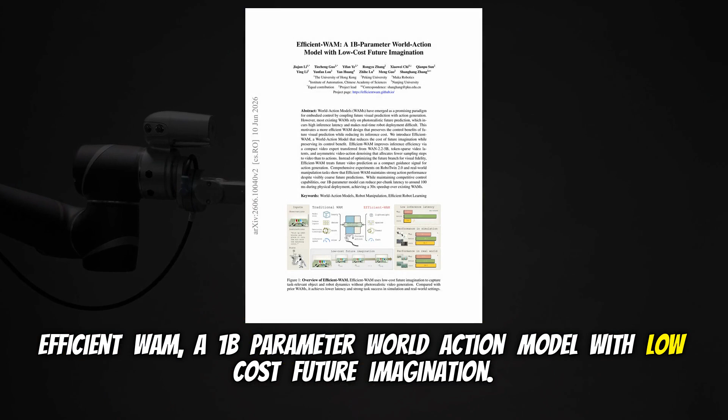Efficient-WAM, a 1 billion-parameter world action model with low-cost future imagination. Yep, that's the paper we're looking at today.

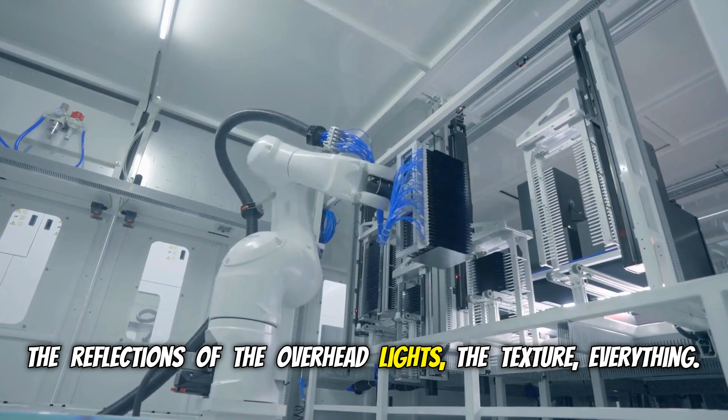Imagine trying to pick up a coffee cup from your desk. But before your brain lets your hand move, it forces you to paint a photorealistic masterpiece of that cup in your mind, complete with the reflections on the ceramic, the overhead lights, the texture, everything. You would move incredibly slowly. And for years, that is exactly what we've been forcing robots to do. World action models, or WAMs, are incredible for giving robots physical intuition, but they're completely bottlenecked because they waste massive amounts of compute trying to generate high-fidelity, photorealistic future videos before they act.

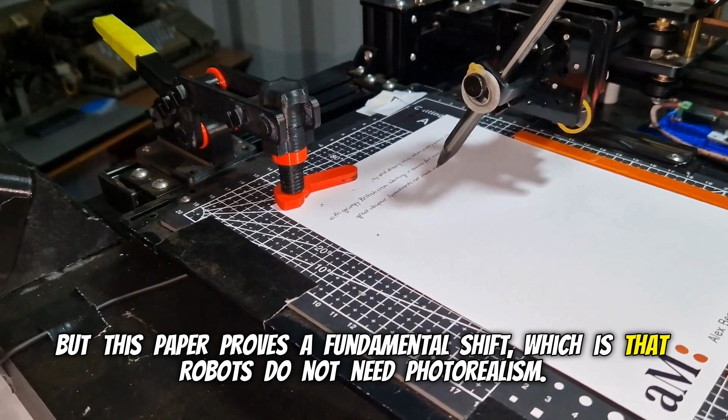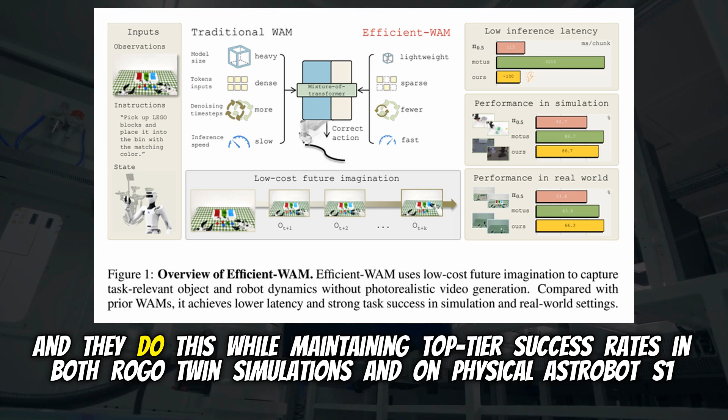But this paper proves a fundamental shift: robots do not need photorealism. They only need coarse geometry and motion cues. So the researchers pruned a 5 billion parameter foundation model down to a 1 billion parameter mixture of transformers. They used intentionally low-resolution future latents and applied an asymmetric denoising schedule. The result is wild: a massive 30x speedup. They cut inference latency down to just 98 milliseconds per action chunk on a standard consumer-grade RTX 4090 GPU, which is huge for edge deployment. And they do this while maintaining top-tier success rates in both RoboTwin simulations and on physical Astrobot S1 hardware.

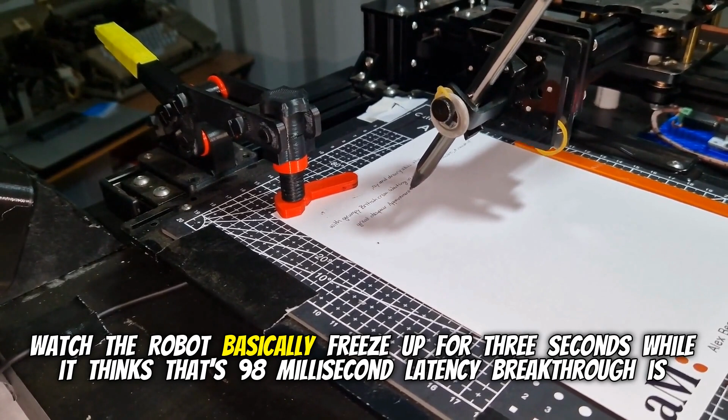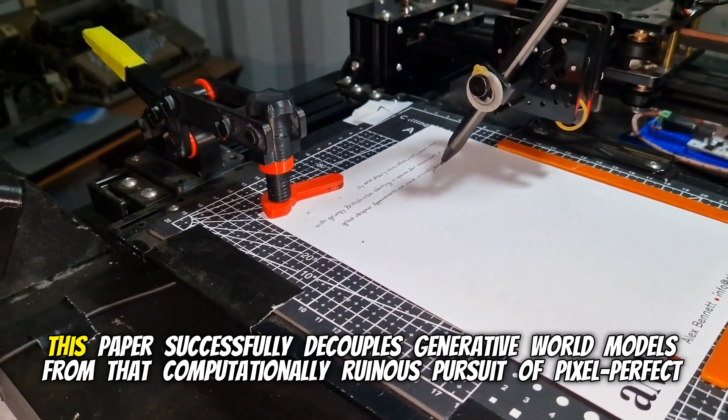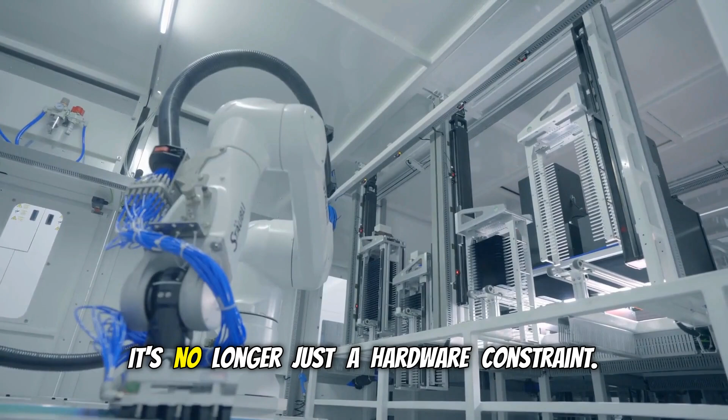Yeah, 3 seconds is an eternity in robotics. It really is. This paper successfully decouples generative world models from that computationally ruinous pursuit of pixel-perfect rendering. For a long time, the prevailing belief in the field has been that sharper, more realistic future visual predictions would naturally yield better physical actions. Like better vision equals better action. Exactly, but this research reframes efficiency. It's no longer just a hardware constraint, it's a fundamental modeling problem. They're basically asking, what does the policy actually need to see to make a physical decision?

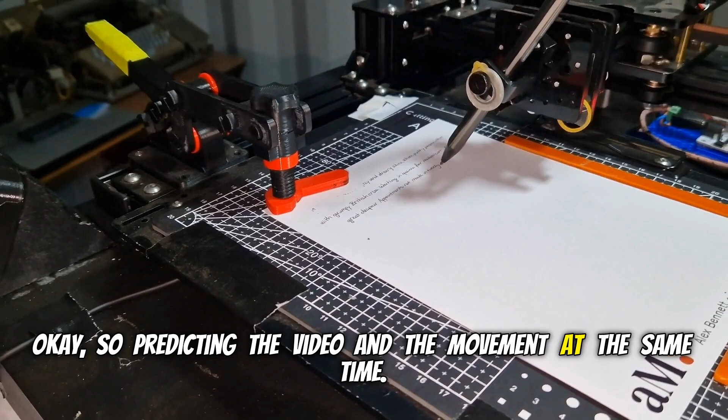Okay, well let's unpack the baseline bottleneck first, so we understand what we're actually improving on here. We hear a lot about these state-of-the-art world action models right now. But what is the actual mathematical objective they're trying to solve that makes them so incredibly slow? Well, the standard WAM objective is to model the joint distribution of future scene evolution and control actions. So predicting the video and the movement at the same time. Right, in plain terms, the model takes in the current visual observation and a language command, and it tries to simultaneously predict two things: what the next few seconds of video will look like and what motor commands the robot should execute to make that future happen.

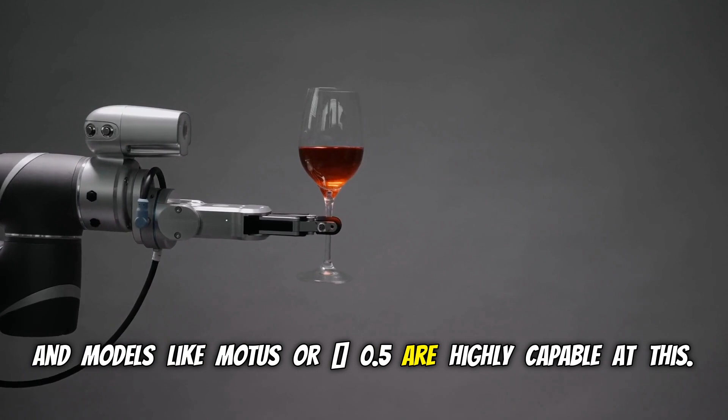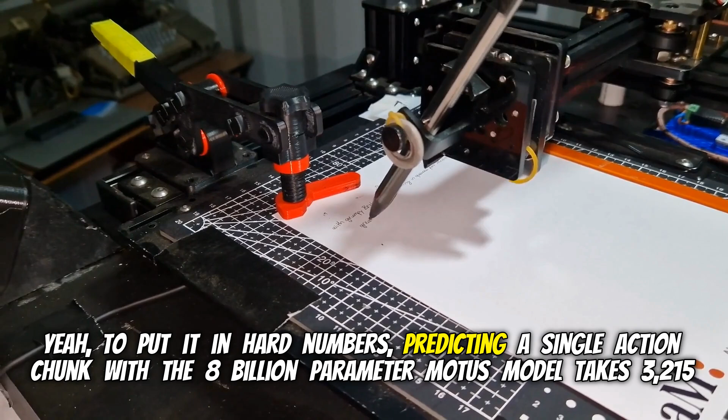And models like Motus or Pi 0.5 are highly capable at this. They're built on massive transformer backbones and process very dense visual tokens. But because they're generating high-resolution video frames alongside the actions, the computational overhead is just staggering. Do we have a sense of exactly how slow that makes them in a real-world deployment? Because slow is subjective. Yeah, to put it in hard numbers, predicting a single action chunk with the 8 billion parameter Motus model takes 3,215 milliseconds.

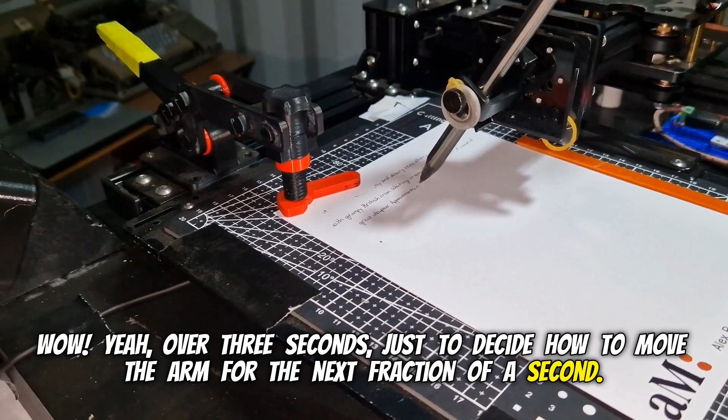Over 3 seconds, just to decide how to move the arm for the next fraction of a second. Over 3 seconds, which again in robotics is an absolute eternity. It's useless in a dynamic setting. If you're working in a kitchen where a pot is boiling over, or a warehouse where a human is walking by, the entire state of the world has changed by the time the robot finishes calculating its 3-second imagination of the future. Which brings us back to your coffee cup analogy. The authors introduce a principle they call action-centric future imagination. I like that phrasing. It basically means the control policy only actually needs structural cues.

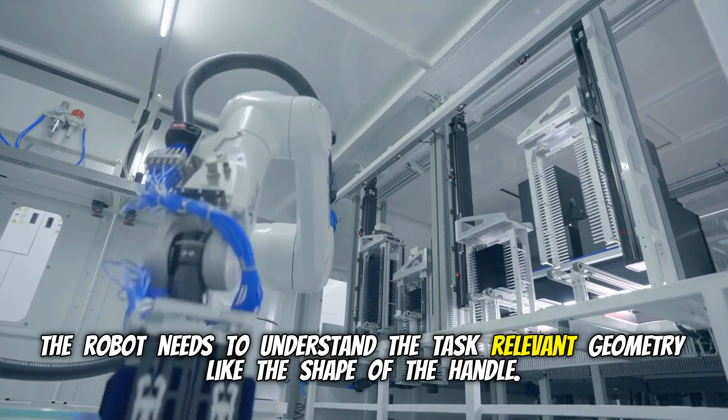Think about the physics of grasping. The robot needs to understand the task-relevant geometry, like the shape of the handle. It needs to understand motion tendencies, like the fact that the liquid inside will slosh if you move it too fast. And it needs to understand contact boundaries.

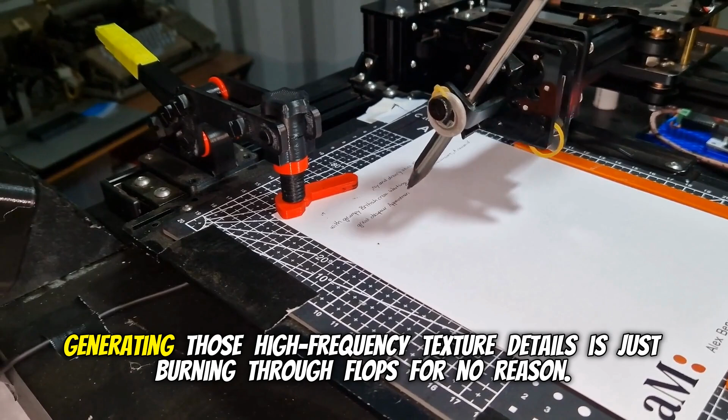Whether the ceramic reflects the room's lighting perfectly, or whether the background wallpaper is rendered sharply, is totally irrelevant to the motor control. Generating those high-frequency texture details is just burning through FLOPs for no reason. Exactly, it's a complete waste of compute. Okay, that makes perfect intuitive sense.

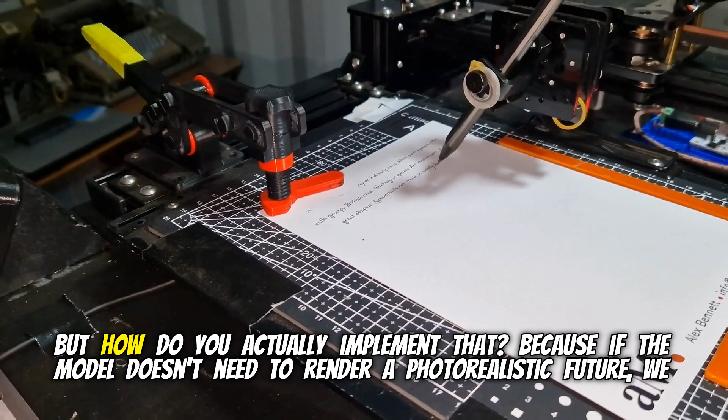But how do you actually implement that? Because if the model doesn't need to render a photorealistic future, we obviously want to shrink the architecture. Right, but you don't want to throw the baby out with the bathwater. These massive foundation models have spent thousands of GPU hours learning how physics works. Gravity, object permanence, friction. So how did the researchers intelligently shrink the model without losing that deep world knowledge?

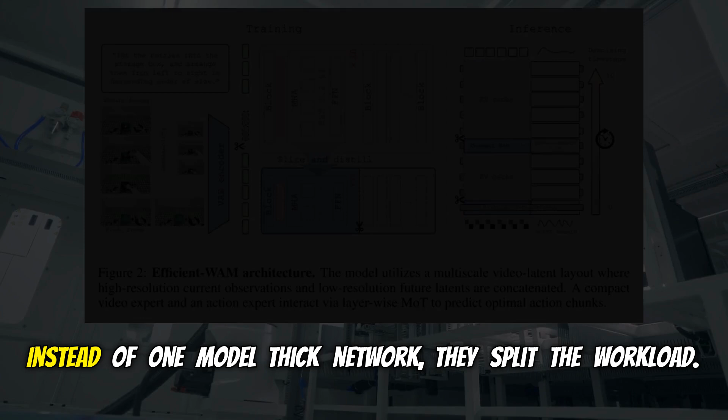So they built a compact mixture of transformers, or MoT framework. Instead of one monolithic network, they split the workload. They created a 0.8 billion parameter lightweight video expert and a 0.2 billion parameter action expert. The video expert's job is purely to predict the visual evolution of the scene, and the action expert's job is to extract motor commands from that prediction.

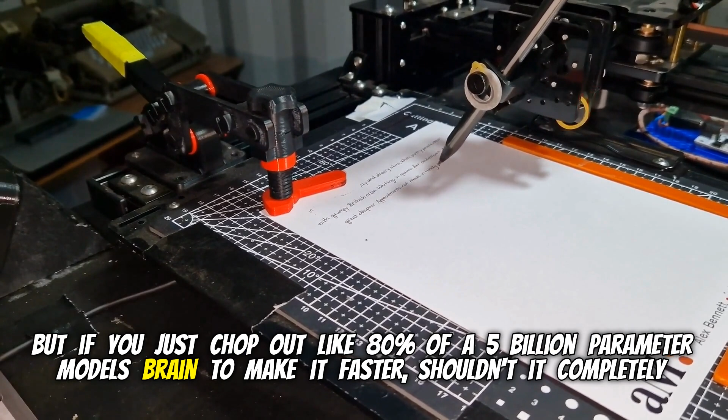Wait, I'm stuck on something here. Getting down to a 0.8 billion parameter video expert sounds great for speed. But if you just chop out like 80% of a 5 billion parameter model's brain to make it faster, shouldn't it completely forget how physics works?

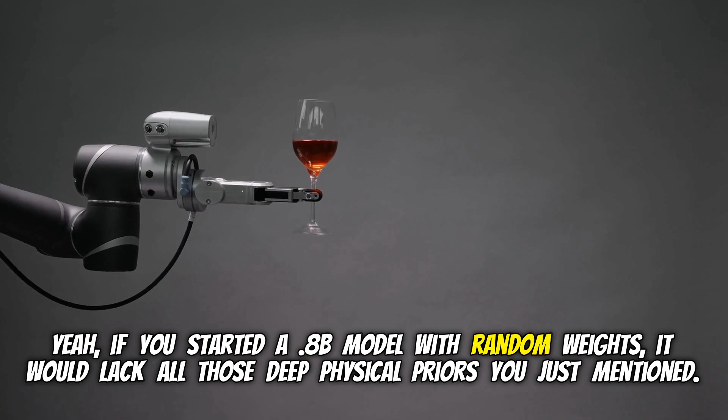Well, you don't train the smaller model from scratch. Yeah, if you started a 0.8B model with random weights, it would lack all those deep physical priors you just mentioned. Instead, they used a technique called structured pruning on a specific foundation model. Which one? Wan 2.2 5B. Okay, so that's a massive, highly capable video generation model.

Right, the researchers performed what's called layer slicing. They didn't just randomly delete weights. They systematically probed the 5 billion parameter backbone to identify very specific attention heads, embeddings, and feed-forward network channels. The ones that activate when the model is processing geometry and dynamics. Exactly, geometry, dynamics, and physical contact.

So it's essentially a surgical extraction. They're going into the neural network and isolating the physics engine from the texture and lighting engine. That's a perfect way to visualize it, yeah. And then pulling only those physics pathways out to form this new 0.8B model.

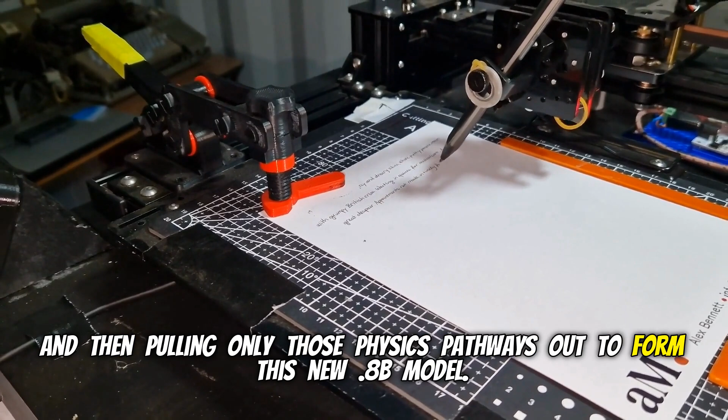Yeah, but extracting those layers is only the first step. You still have to train that sliced-down student model so it doesn't just collapse into producing total nonsense. Right, of course. That happens in stage 1 of their training recipe.

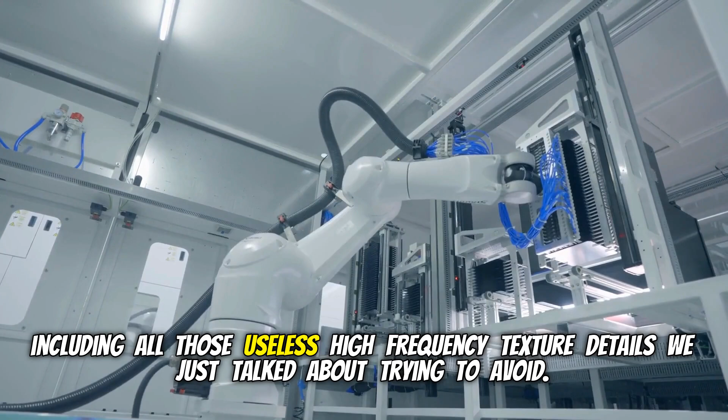And they don't just use standard flow matching, which is the typical process of training a model to iteratively denoise random static into a coherent image, right? Right, because standard flow matching would just teach it to blindly recreate whatever video it saw in the training data, including all those useless high-frequency texture details we just talked about trying to avoid.

Exactly. Instead, they explicitly force the 5 billion parameter teacher model to guide the 0.8 billion parameter student model. They use a teacher-guided distillation loss. How does that actually work computationally?

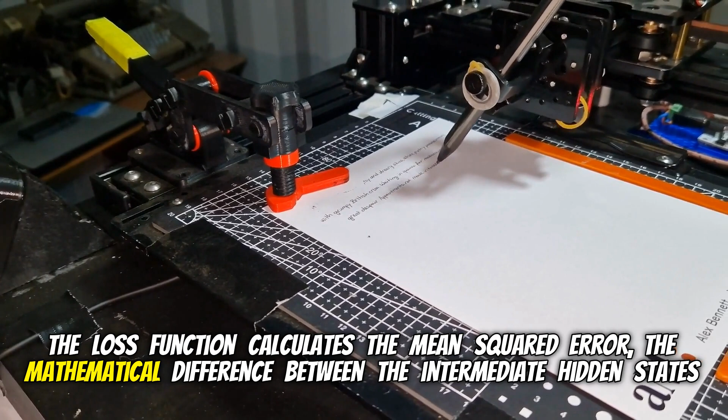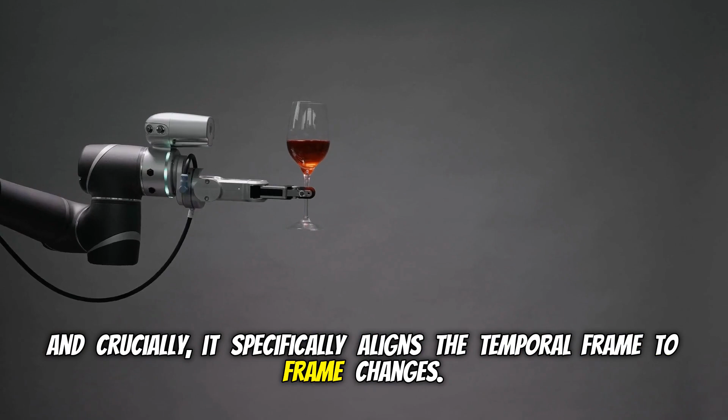Well, they run the same input through both the massive teacher and the tiny student. The loss function calculates the mean squared error, the mathematical difference between the intermediate hidden states of the student and the teacher. So they're literally comparing the hidden states. Yeah, and crucially, it specifically aligns the temporal frame-to-frame changes, meaning the motion cues. Correct. The student is explicitly mathematically penalized if it fails to capture the dynamic evolution of the scene exactly the way the 5B model predicted it would move.

Wow. Yeah, it forces the 0.8B model to prioritize structural and dynamic accuracy over visual fidelity. It becomes highly action-centric. Okay, so we've successfully shrunk the brain of the model.

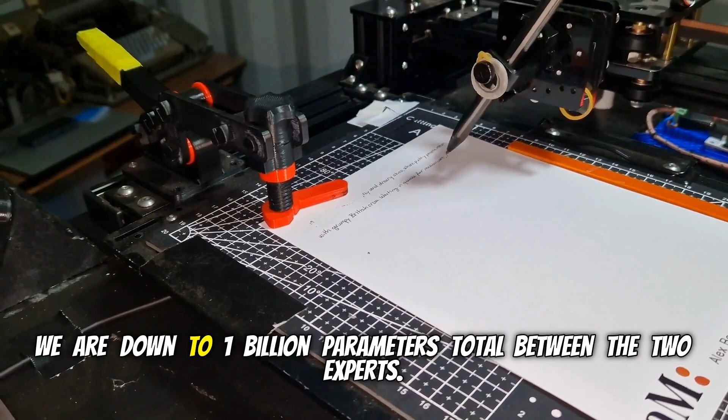We are down to 1 billion parameters total between the two experts. But if that brain is still looking at high-definition, dense video frames, the processing time is still going to be massive. Right, because of the tokens. Because the computational cost of attention mechanisms scales quadratically with token density.

You double the amount of pixels you're looking at, you basically quadruple the amount of math a transformer has to do. Exactly. So how did they solve the visual data problem?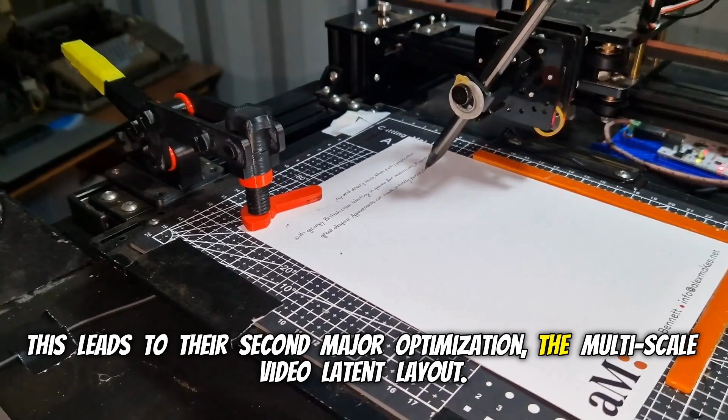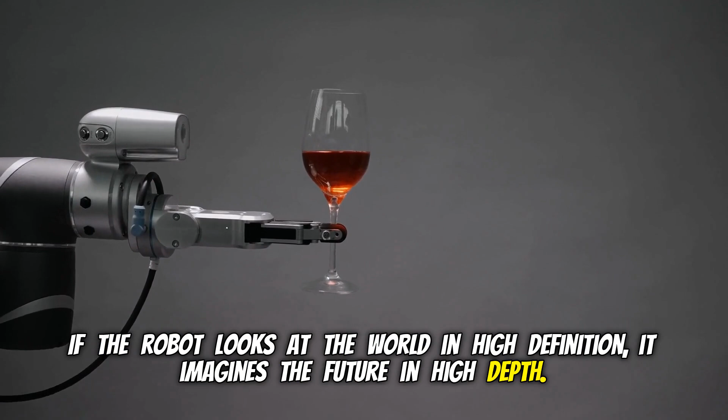This leads to their second major optimization, the multi-scale video latent layout. Usually, world action models predict future videos at the exact same uniform resolution as the input observation. If the robot looks at the world in high definition, it imagines the future in high def. Efficient-WAM breaks this symmetry. Just to ground this for everyone, when they process these visual frames, they are running them through a VAE, a variational autoencoder. Right, standard procedure. So we're talking about compressing that raw visual pixel data down into its most essential mathematical representation, which we call latents or tokens.

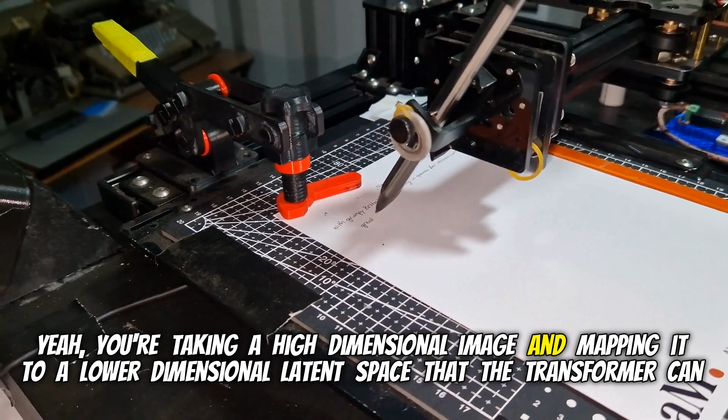Yeah, you're taking a high-dimensional image and mapping it to a lower-dimensional latent space that the transformer can actually process efficiently. Okay, so what does Efficient-WAM do differently with the VAE?

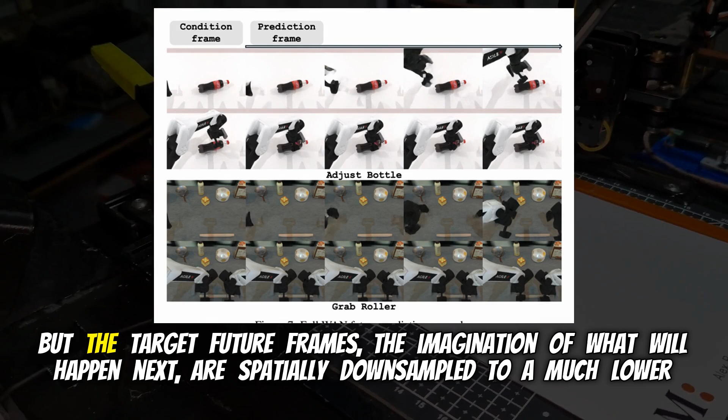So the current observation, what the robot is looking at right now, is encoded through the VAE into high-resolution condition tokens, specifically a spatial resolution of 384 by 320. That's pretty standard. But the target future frames, the imagination of what will happen next, are spatially downsampled to a much lower resolution, down to 192 by 160, before they are ever encoded by the VAE.

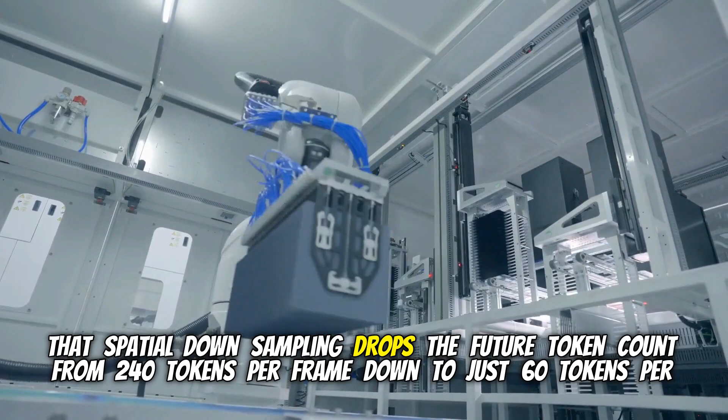Wait, so they are intentionally degrading the resolution of the future? Yes. How much compute does that actually save? A tremendous amount. That spatial downsampling drops the future token count from 240 tokens per frame down to just 60 tokens per frame. Oh, wow. Yeah, you're slashing the density of the future imagination by 75%.

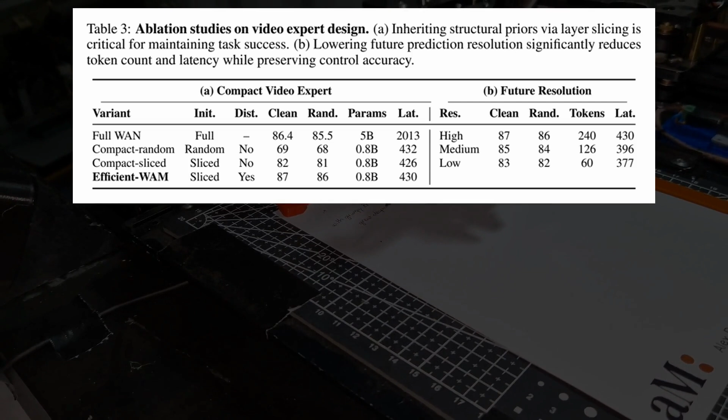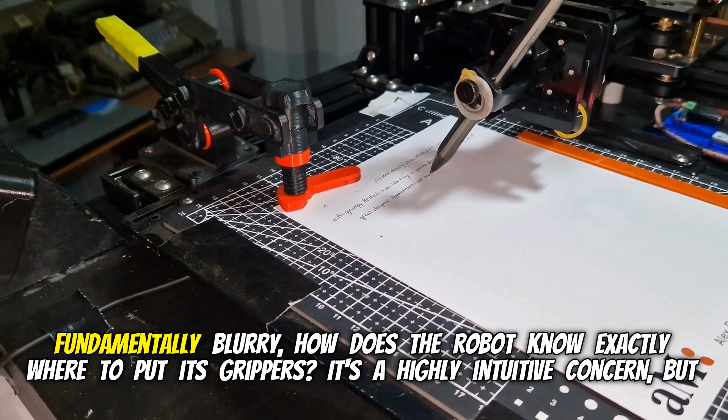But hold on, I have to push back here. If the robot's imagination of the future looks like a blurry, pixelated mess, doesn't that inherently lead to inaccurate, sloppy physical actions? That's what you would think, right? Yeah. I mean, if I'm trying to thread a needle or grip a really fragile object, and my mental model of the future is fundamentally blurry, how does the robot know exactly where to put its grippers?

It's a highly intuitive concern, but it kind of misunderstands how the joint attention mechanism operates under the hood. Okay, explain it to me. The genius here lies in concatenating or linking together these multi-scale latents. Remember, the current frame remains at high resolution. Right. So the action expert still has absolute high-fidelity spatial details of the present state. It knows exactly where the sharp object boundaries are right now in physical space. Ah, I see. So it isn't flying blind.

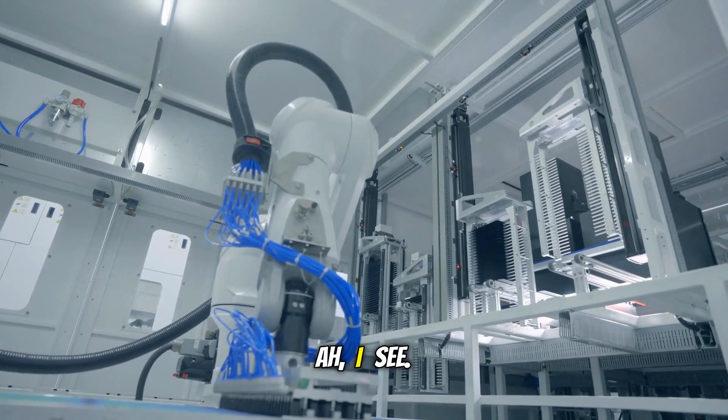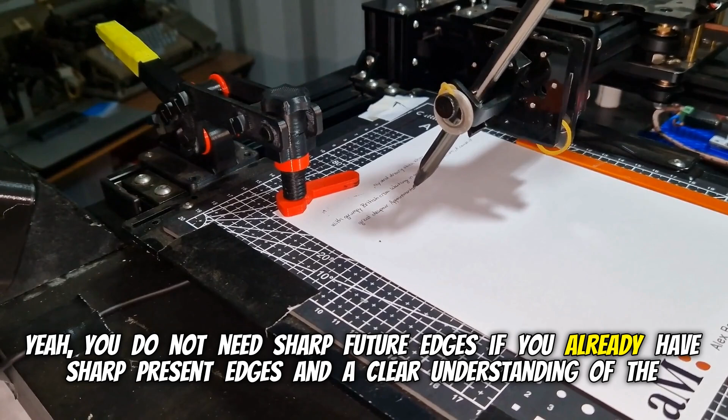Not at all. The token-sparse low-resolution future latents are simply appended to that high-resolution present sequence. So the blurry future merely serves as a coarse dynamic guide for where things are going to move. Exactly. The model cross-references the high-resolution present with the low-resolution future trajectory to extract the precise control signals. That is so smart. Yeah, you do not need sharp future edges if you already have sharp present edges and a clear understanding of the mathematical motion vector.

Okay, so it uses the blurry future as a directional hint, basically a motion path, while relying entirely on the sharp present for the actual precise motor coordination. Exactly. That is incredibly clever.

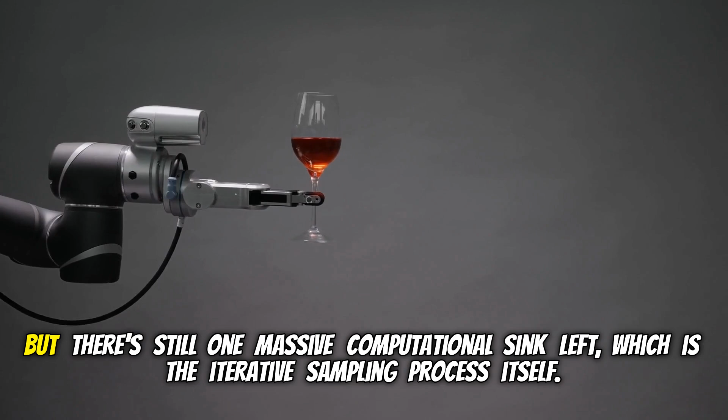Okay, so the model weights are smaller, and the token count is slashed by 75%. But there's still one massive computational sink left, which is the iterative sampling process itself. You're referring to the flow matching generation loop. Exactly. Because in diffusion or flow matching models, generation isn't a one-and-done calculation. You start with noise, and you have to loop through multiple denoising steps. Right, refining the prediction over and over again until it forms a coherent output. And every single step requires a full pass through the neural network. So if you need 10 steps to generate an action, you're running that model 10 times.

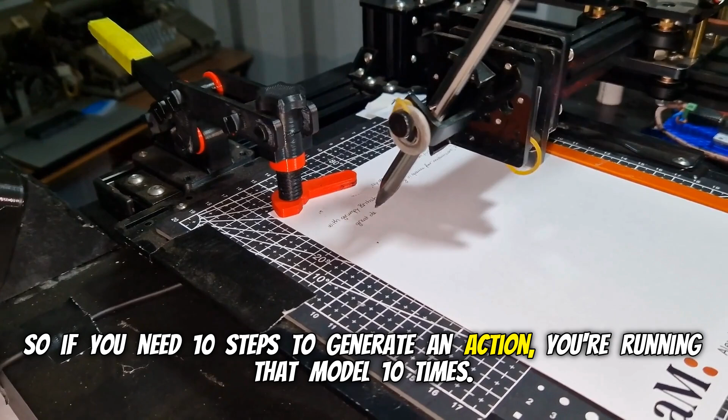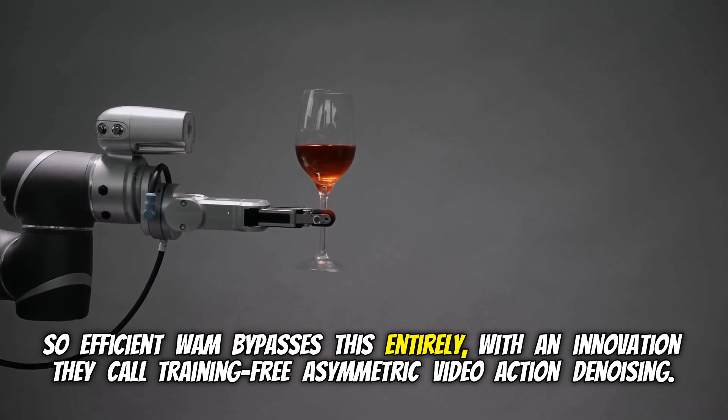In traditional generative WAMs, both the video prediction branch and the action generation branch are forced to share that exact same iterative denoising schedule. So they're locked together. Yep. If the policy determines that it needs 10 steps of refinement to guarantee a precise, safe robotic action, the architecture forces the model to also compute 10 steps of video generation. Which, as we've established, is largely a waste of compute, since we don't really care about the fine visual details that emerge in those later steps. Exactly. So Efficient-WAM bypasses this entirely with an innovation they call training-free asymmetric video action denoising.

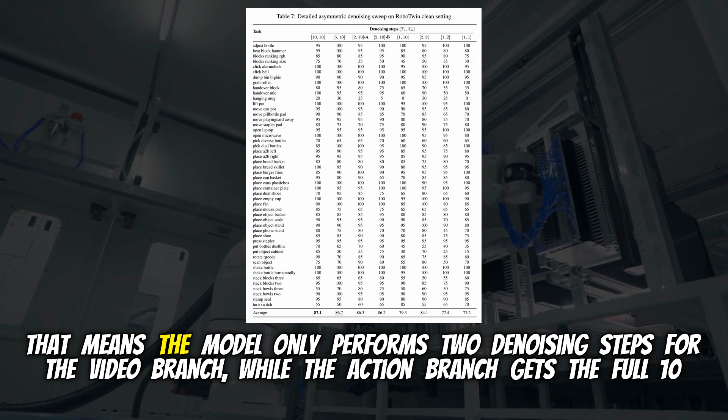Okay, what does that asymmetry actually look like in practice? How do they split it? They landed on a really aggressive configuration, a 2-10 split. Wait, just 2? Yeah, that means the model only performs 2 denoising steps for the video branch, while the action branch gets the full 10 steps of refinement.

That's crazy. It's like an artist doing a quick, rough 2-second pencil sketch of a scene just to know where the objects are, and then spending 10 minutes carefully drawing the exact hand movements over that sketch. That's a great analogy, instead of trying to oil paint the entire scene from scratch.

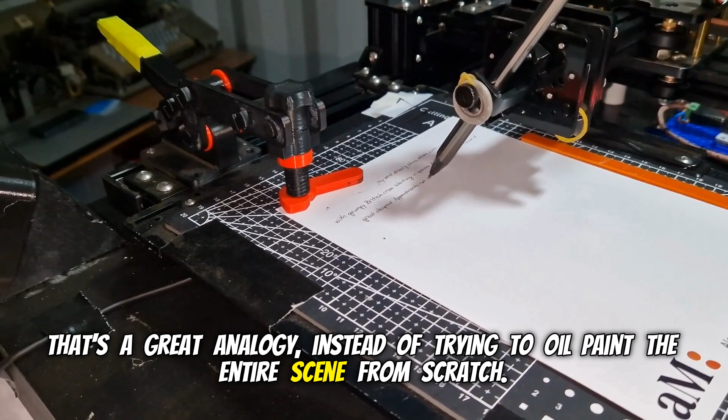But why does just 2 steps work? I mean, how can the action branch derive anything useful from a video prediction that was halted after only 2 iterations of denoising? It must still look mostly like static.

The mechanics behind why this works are deeply rooted in how structure resolves during flow matching. When a model transforms noise into data, it doesn't resolve all features simultaneously. Low-frequency data emerges first, global structural cues.

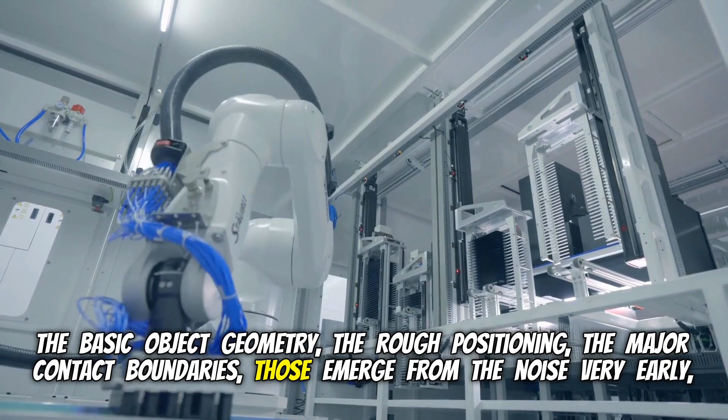Right, the basic object geometry, the rough positioning, the major contact boundaries, those emerge from the noise very early, typically within the first 1 or 2 steps. So the physics basically reveals itself first.

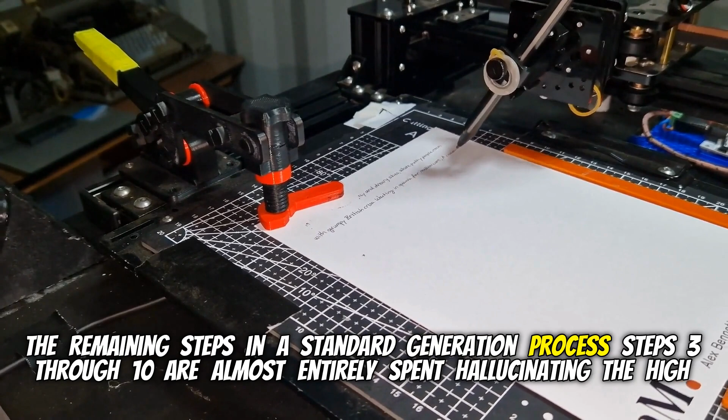Exactly. The remaining steps in a standard generation process, steps 3 through 10, are almost entirely spent hallucinating the high-frequency details, the lighting, the micro textures, the reflections. By halting the video generation after just 2 steps, the researchers save massive amounts of compute.

So the model just caches those early-stage, structurally sound video features and reuses them to condition the remaining 8 steps of the action refinement.

That is brilliant. The action branch gets the full sampling depth it needs to calculate a safe physical trajectory, while the video branch is literally put to sleep the moment the structural dynamics become actionable. It's all about pruning away unnecessary work.

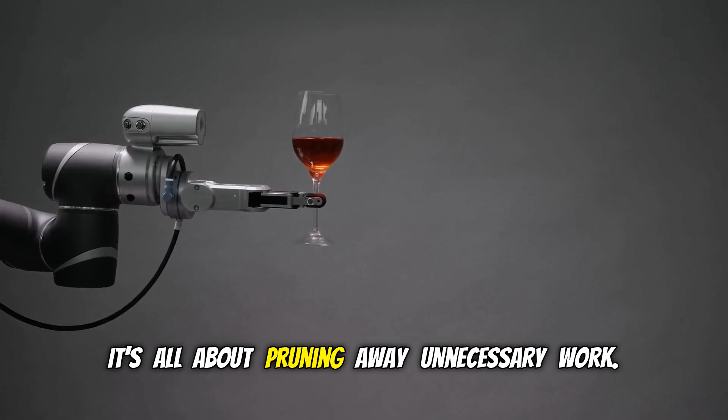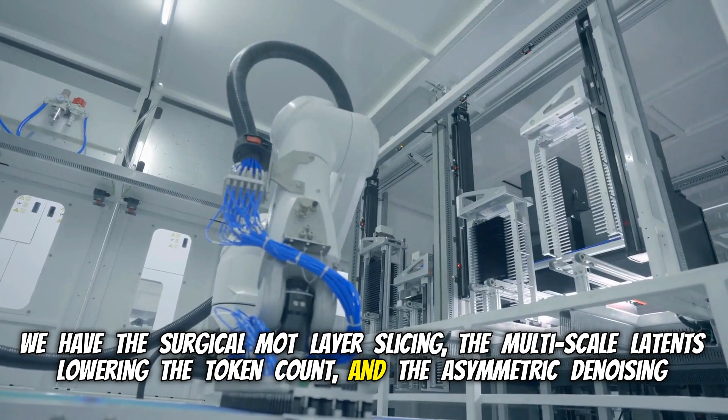Okay, we've walked through all the major theoretical optimizations. We have the surgical MOT layer slicing, the multi-scale latents lowering the token count, and the asymmetric denoising saving us from looping through useless video generation.

Yeah, it sounds incredibly elegant on paper, but in robotics, elegance doesn't matter if the robot drops the ball. Let's look at the empirical results. They started in simulation, right?

Yes, they evaluated the model in the RoboTwin 2.0 simulation environment. They ran it across 50 distinct manipulation tasks. Okay, and how did it do?

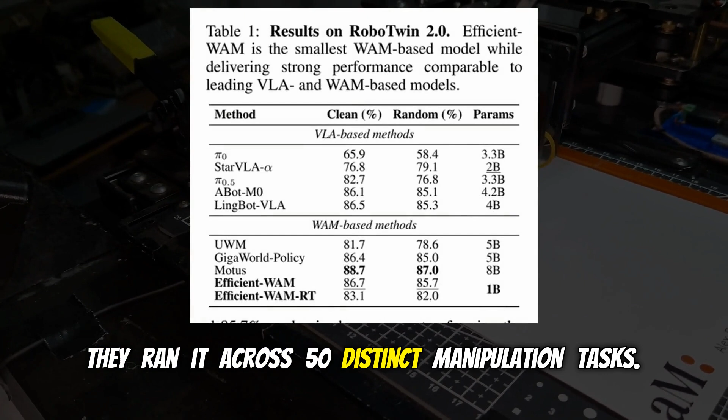The 1 billion parameter Efficient-WAM achieves an 86.7% clean success rate. That sounds pretty high. It is. To put that in context against the landscape of current research, it easily outperforms larger VLA models like the 4 billion parameter Lingbot and even the 5 billion parameter GigaWorld policy.

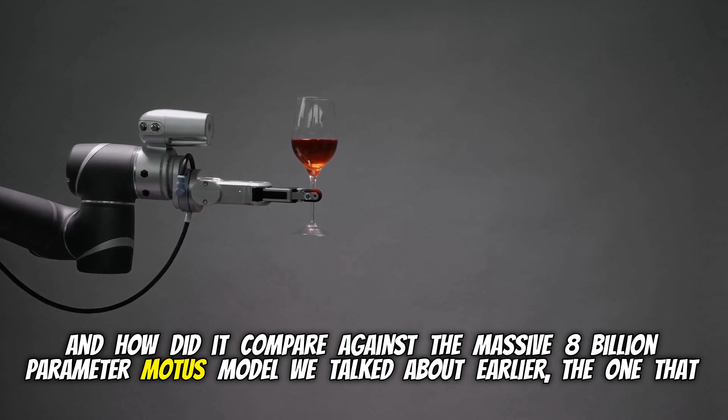Wow, and how did it compare against the massive 8 billion parameter Motus model we talked about earlier, the one that takes 3 seconds to think? It trails Motus by only 2%.

Are you serious? Yeah, so they've shed 87% of the total parameter count, heavily degraded the future visual resolution, truncated the video denoising process, and the cost was a mere 2% drop in simulated task success.

But simulation is one thing. The physics are perfect, the lighting is controlled, there's no sensor noise. Real-world physics is messy. Oh, absolutely.

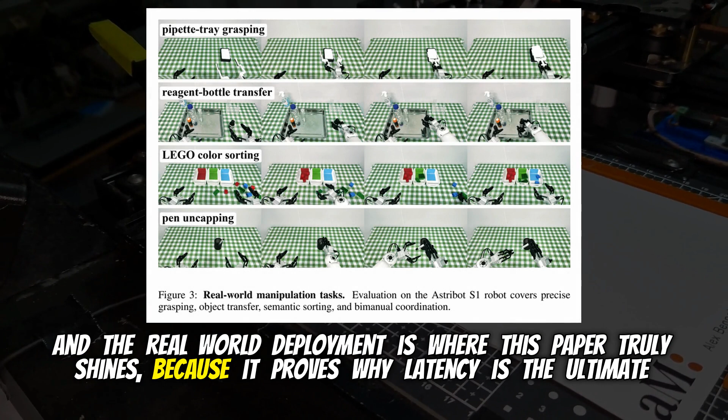I see they deployed the fully optimized version, which they call Efficient-WAM-RT, onto actual physical hardware. They use the Astribot S1. And the real-world deployment is where this paper truly shines, because it proves why latency is the ultimate bottleneck in robotics. Okay, what kind of tasks did they test?

They ran 20 trials per task across a variety of challenges, things like pipette tray grasping, reagent bottle transfer, sorting Legos by color, and fine-grained pen uncapping. Okay, and the results, did that 2% simulation gap hold up?

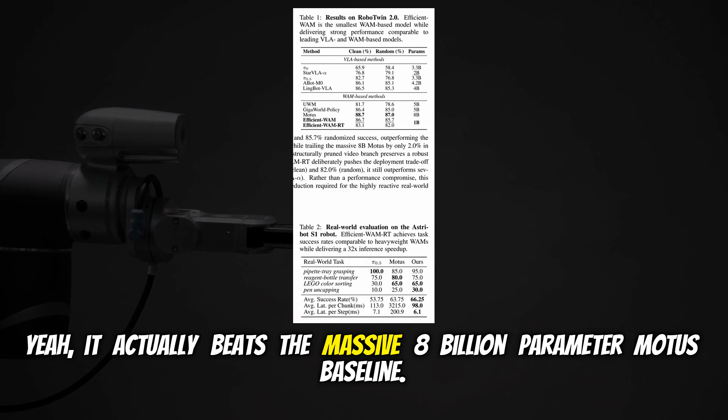Actually, the results flipped. Efficient-WAM achieved a 66.25% average success rate across those complex physical tasks. Wait, that beats Motus. Yeah, it actually beats the massive 8 billion parameter Motus baseline, which sat at 63.75%.

But wait, how is that possible? The smaller, heavily pruned, lower resolution model beat the massive foundation model in the real world. It has a worse imagination of the world by design. It beats the larger model precisely because of the latency reduction. Right, remember, Motus is sitting there calculating for 3,215 milliseconds before it outputs an action chunk.

Efficient-WAM drops that latency down to just 98 milliseconds on a local RTX 4090. That is a 32x speedup. Yeah, it's the difference between open loop and closed loop control.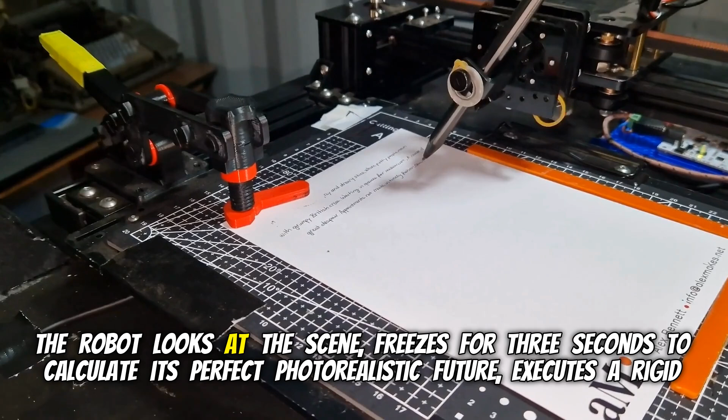Okay, explain that difference for us. Heavyweight generative models force a robot into sluggish, start and stop, open loop execution. The robot looks at the scene, freezes for 3 seconds to calculate its perfect photorealistic future, executes a rigid movement, and then has to freeze again. And in the real world, the environment changes during those 3 seconds.

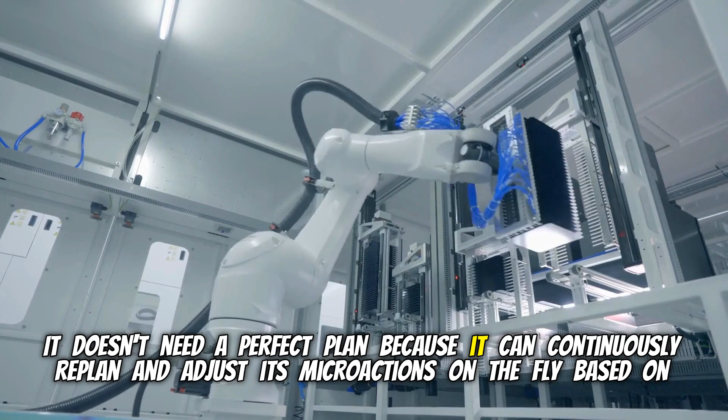Objects slip, lighting shifts, momentum carries things further than expected. Exactly. But by breaking the 100 millisecond barrier, Efficient-WAM unlocks fluid, closed-loop manipulation. The robot is reacting 10 times a second. Oh, I see. It doesn't need a perfect plan because it can continuously replan and adjust its microactions on the fly based on real-time visual feedback.

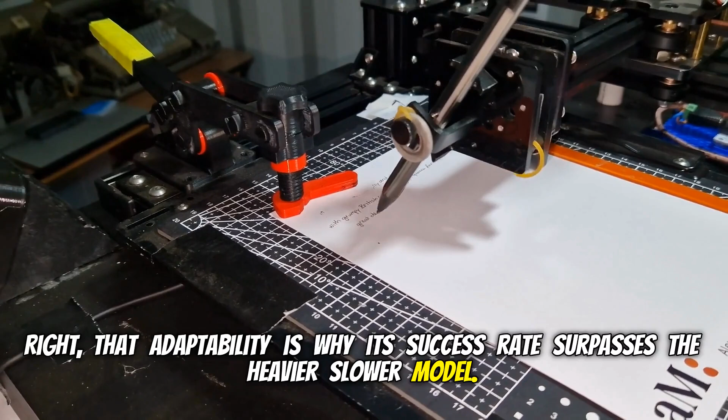Right. That adaptability is why its success rate surpasses the heavier, slower model. It's reacting instead of just predicting. It shifts the paradigm from perfect planning to rapid correction. And in real-world physics, rapid correction almost always wins.

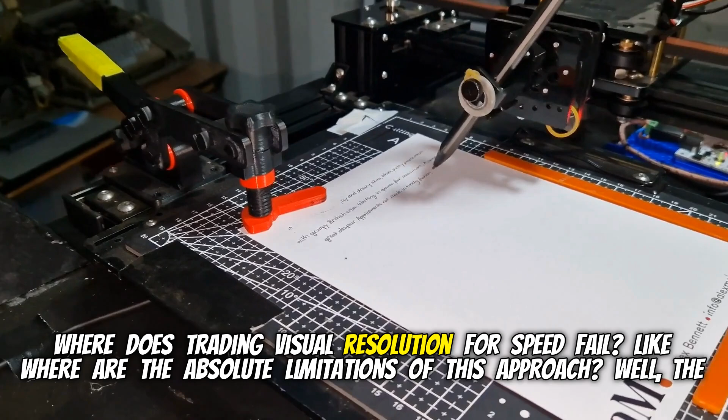Definitely. But there is no such thing as a free lunch in machine learning architecture. Every optimization is a trade-off. Where does trading visual resolution for speed fail? Like, where are the absolute limitations of this approach? Well, the researchers are very transparent about the edge cases where this methodology breaks down.

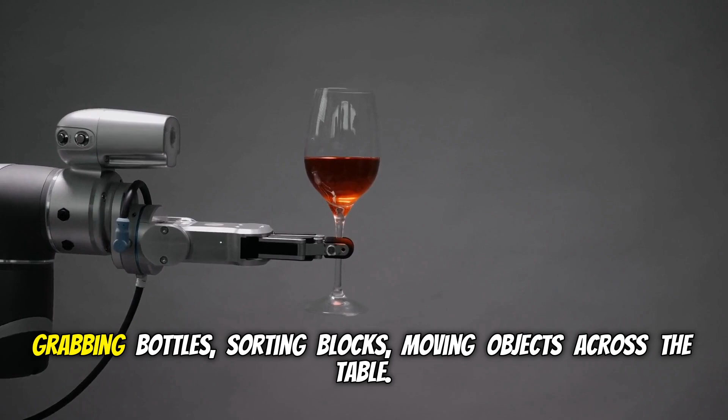Okay, what are they? The low-resolution future latents and the truncated video denoising are highly effective for macroscopic manipulation. Grabbing bottles, sorting blocks, moving objects across a table. Big movements. But for extreme micromanipulation tasks, things like inserting a tiny thread into a needle or ultra-precise industrial assembly,

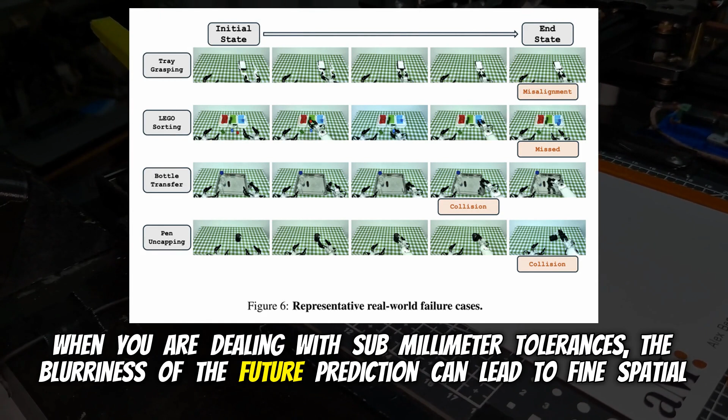this approach struggles. Because in those specific cases, the pixel-level precision of the future state is actually required to verify physical tolerances. Yes. When you are dealing with sub-millimeter tolerances, the blurriness of the future prediction can lead to fine spatial misalignment. So the robot's end effector might be off by just 2 or 3 millimeters.

Which is irrelevant when grabbing a coffee cup, but results in a hard contact collision or a misgrasp when inserting a microchip. So what does this all mean for the listener who might be building or researching these systems right now? One glaring limitation that jumps out to me is the reliance on static inference schedules.

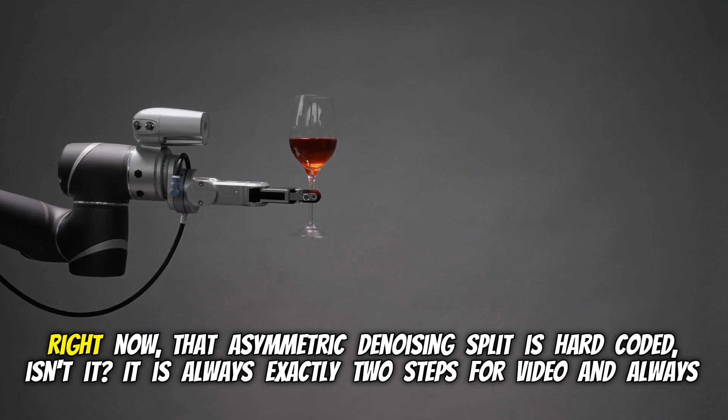Right. Right now, that asymmetric denoising split is hard-coded, isn't it? It is always exactly 2 steps for video and always 10 steps for action, regardless of what the robot is actually trying to do.

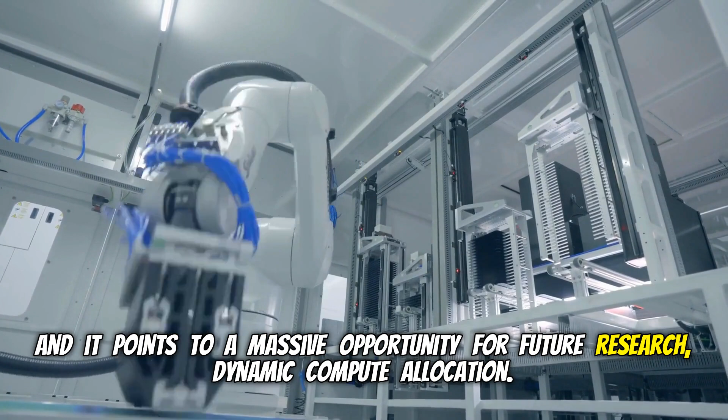That is currently hard-coded, yeah, and it points to a massive opportunity for future research, dynamic compute allocation. Oh, that sounds interesting. Imagine a control policy that doesn't use a fixed rigid schedule. Instead, it dynamically scales its video denoising budget based on the scene entropy or the perceived task difficulty.

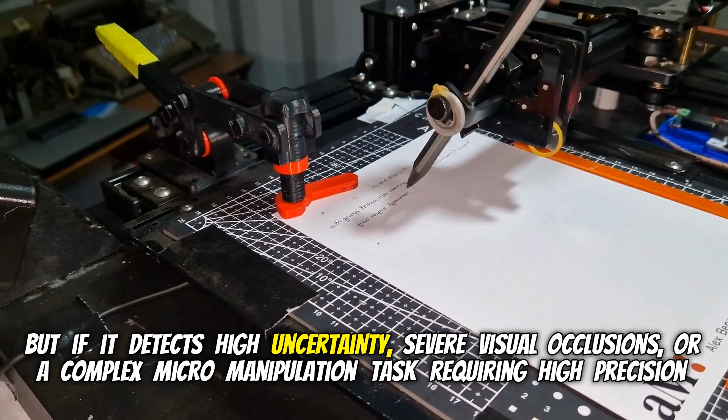So if it's doing a simple transfer task, just moving a block from point A to point B, it uses one video step and zips through it. Exactly. But if it detects high uncertainty, severe visual occlusions, or a complex micro-manipulation task requiring high-precision physical interactions, the policy could dynamically allocate 5 or even 8 steps to the video branch.

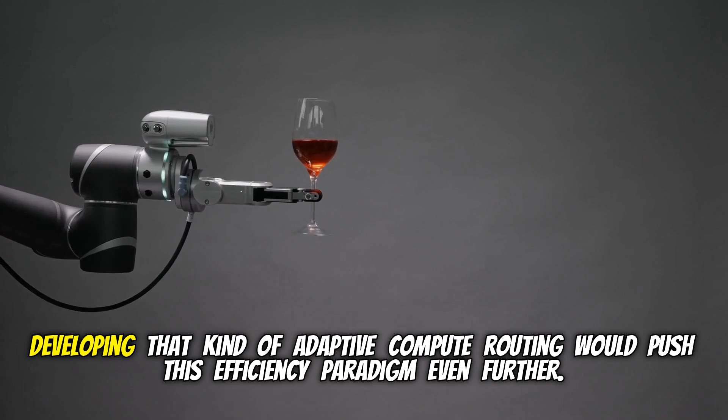So it would intentionally slow itself down to sharpen its internal imagination only when the physics of the task strictly demand it. Right, developing that kind of adaptive compute routing would push this efficiency paradigm even further, bridging the gap between rapid macroscopic reflexes and precise microscopic planning. Exactly. That is a fascinating frontier for the field to explore next.

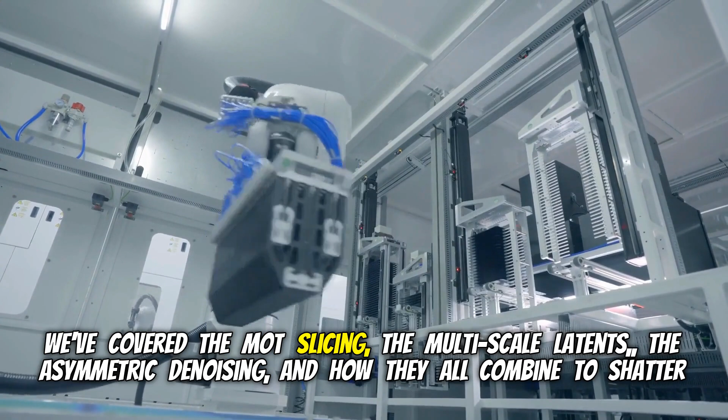We've covered the MOT slicing, the multi-scale latents, the asymmetric denoising, and how they all combine to shatter the 100 millisecond latency barrier for world action models.